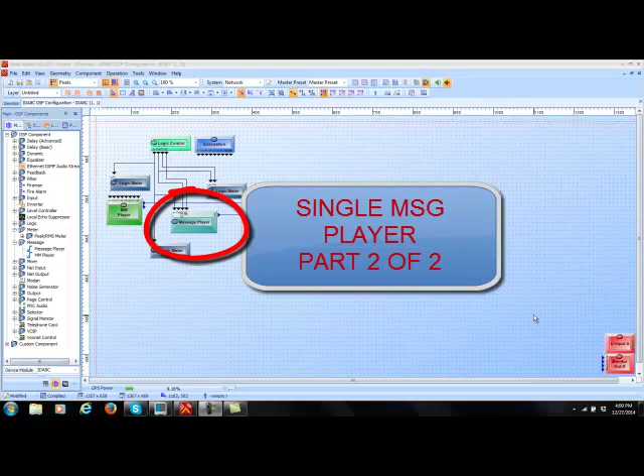And this is part 2 of the two-part tutorial video series on explaining the differences between the two message player components found in the IDA8's ATIS Studio software. Please make sure you have viewed the previous videos before this two-part series that described how to do audio message file management and the basic message player setup before viewing either of these two videos, as it is assumed at this point that you're already familiar with the file management portions of the message player setups.

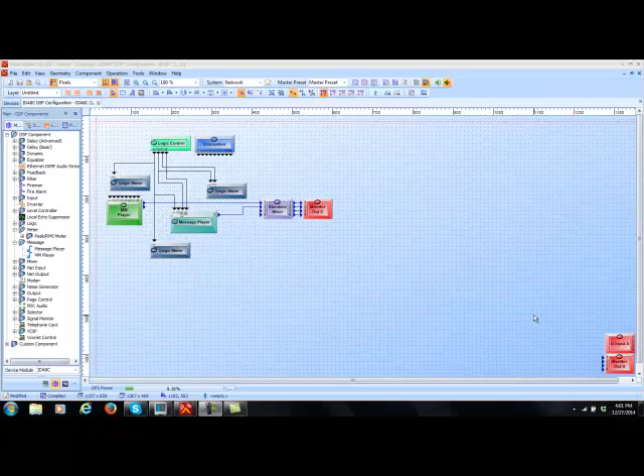As described in part 1 of this series, there are two types of DSP message players that you can use in your design, the multi-message and the single message player components. This video, part 2, will explain how to use the single message player and all of its features and functions. So let's begin. The single message player can be found right where the multi-message player is, right under message in the DSP main component list.

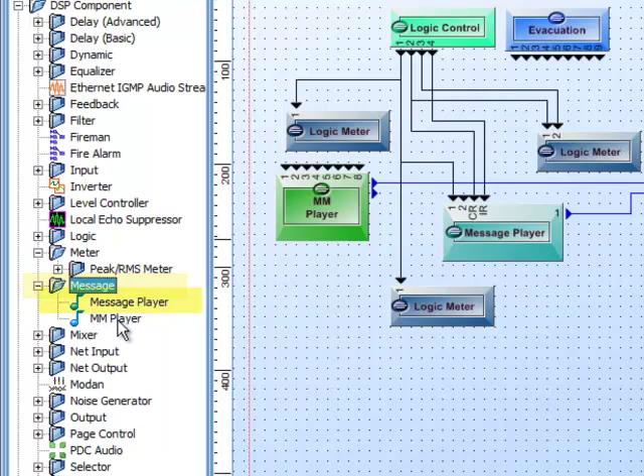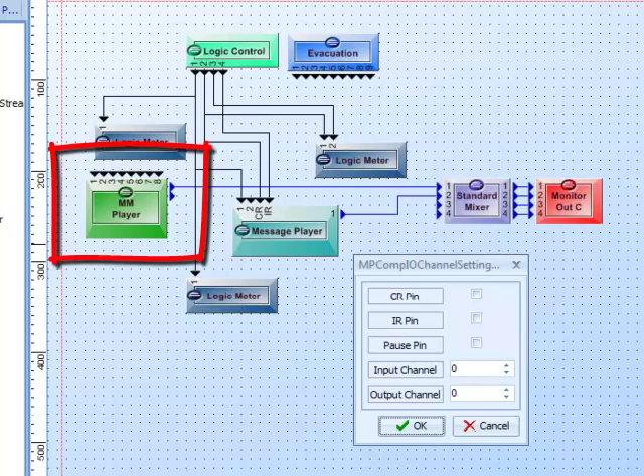If we expand the message tree out, you'll see the MM player, which is the multi-message unit, and the single message player. So if we drag a message player in here, it gives us several options to set up the message player. Now remember, in the multi-message unit, it just came in with 8 logic triggers and 2 audio outputs, and that was it. You didn't have any options. The single message player does have options, and the options are as follows.

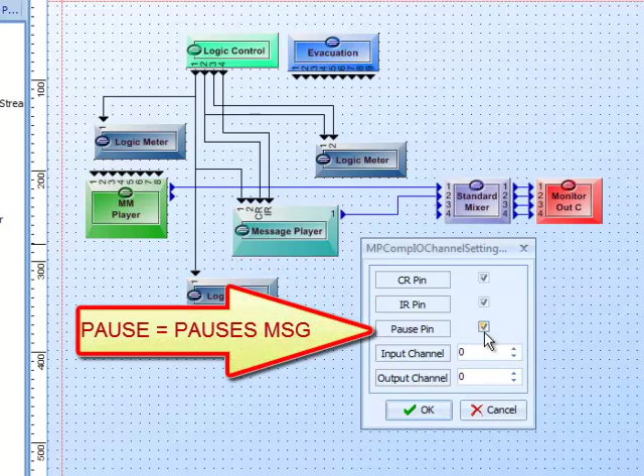The CR pin is the clear or reset pin, and you can elect to have that pin on your message player or not. The IR is the interrupt pin, and you can choose to have that logic pin on your component or not. And then the pause pin is another pin that you can elect to be shown on your component. The input and the output are just the logic input triggers, and you can enter the number of different logic triggers that you would like. And the output channel is actually the output triggers if you want to do other subsequent logic programming along with playing the message. We will stop this because I already have a message player entered in here.

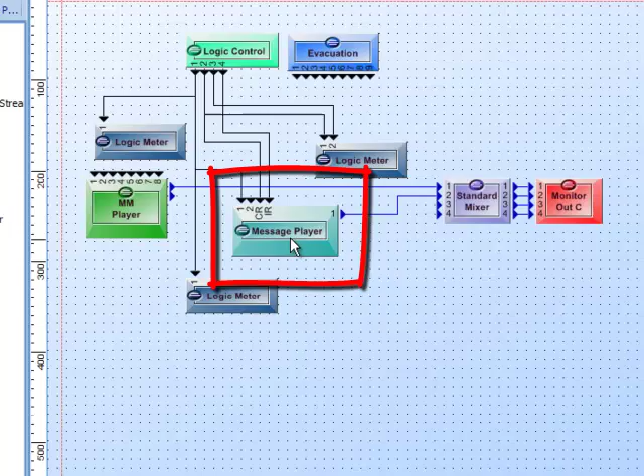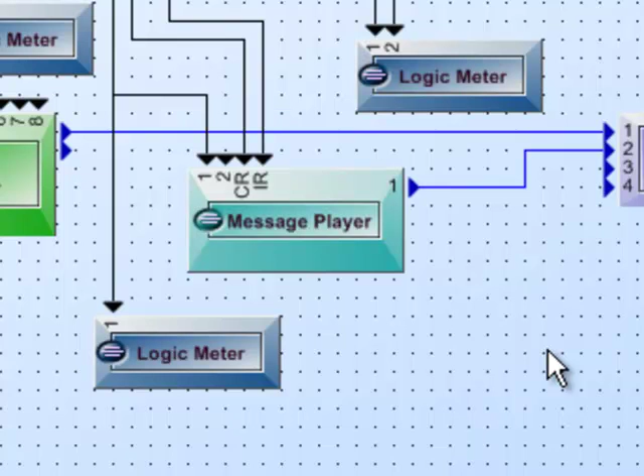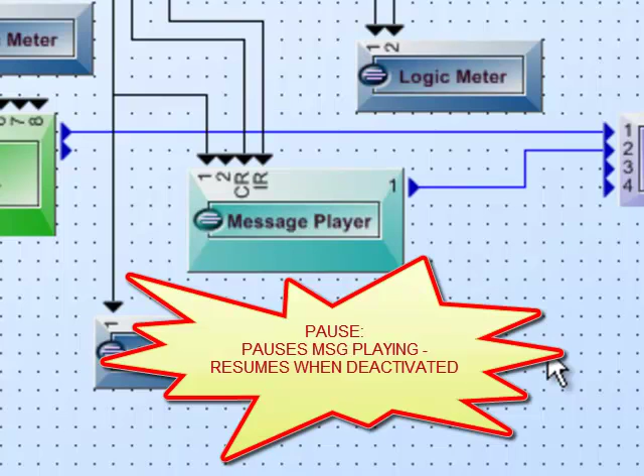I have 2 logic input channels, 1 and 2. I have the clear and reset pin shown and the interrupt pin shown. Pauses are commonly used if you have other messages or audio or pages going and you have messages that are repeating throughout the day. Then what you can do is you can actually have the page audio trigger a logic output that would trigger the pause in your message player. So that way when the pages are going, instead of ducking and losing messages, it actually pauses the message player and then picks right back up where it left off so they don't lose any audio information.

Without further ado, let's open up the single message player. I open it up. The first thing you have to do is actually create the message event. And there is only one event in the single message player. Remember, in the multi-message unit, you had 2 events because you have 2 audio outputs and you can string multiple files together to make one big message. We will click Add. And we have Event 1, and we will name this Shuffling, and we will give it an audio file to play.

Now, just like in the multi-message unit, you'll go to the same window. We want to make sure we are in the machine portion of this, and we will select the 3-tone gong. Now, just like in the multi-message unit, I can add subsequent audio files to a single message event. I will go here and I will say Shuffling. Make sure we're in the machine. Click Shuffling, and there we go.

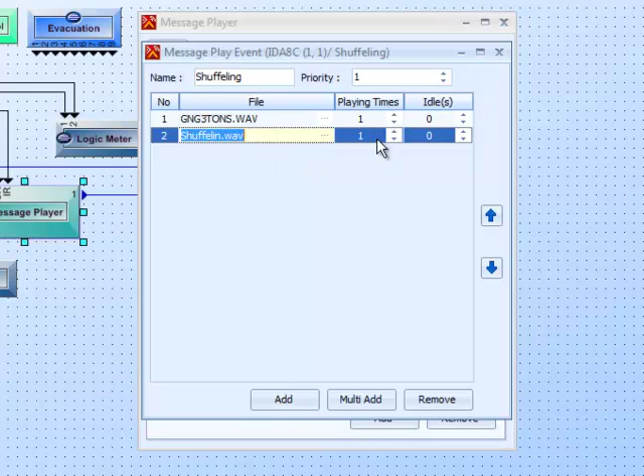Another function within the single messaging unit is that with each single audio file, I can actually select how many times I want that audio file to play before it moves on to the next file. I will leave it for 1 right now, but if I left it for 2 or 3, it would play the 3-tone gong 2 or 3 times. Then it would move on to play the next audio file, the shuffling.

The idle in seconds is actually the time between the audio files that it plays. Remember, in the multi-message unit, it played one right after another to make a coherent long message. With this one, you can play multiple messages and add seconds of space between each audio segment. So we will say nothing between the gong and the shuffling, but we will say 1 second from the shuffling before it goes back to do anything else, such as if we tell it to repeat twice, there will be a 1 second pause between the repeats.

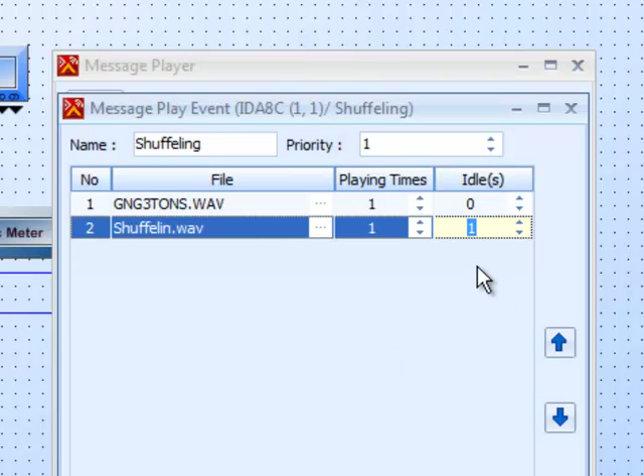So that's all we need to do for that. So now we've created our event. Now we can add other events, let's just say Delta, and we can select the message file that we want for the Delta, just like we did before.

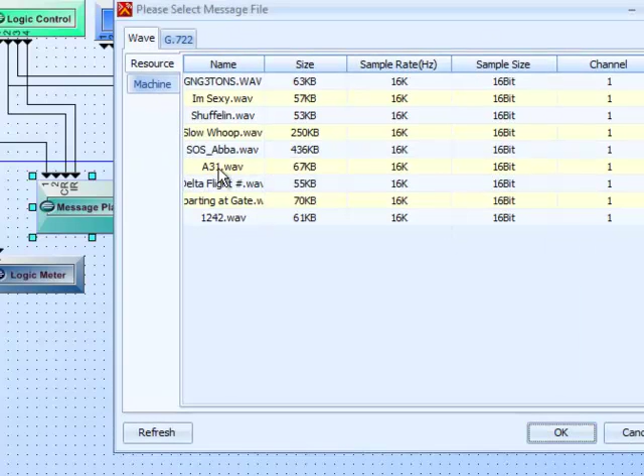There's Delta flight number 1242, and it's departing from a new gate, and we will add that, and that would be A31. And if we leave these zeros, it would play it straight through. At the end, let's say we'll put a 2-second pause, and there you go.

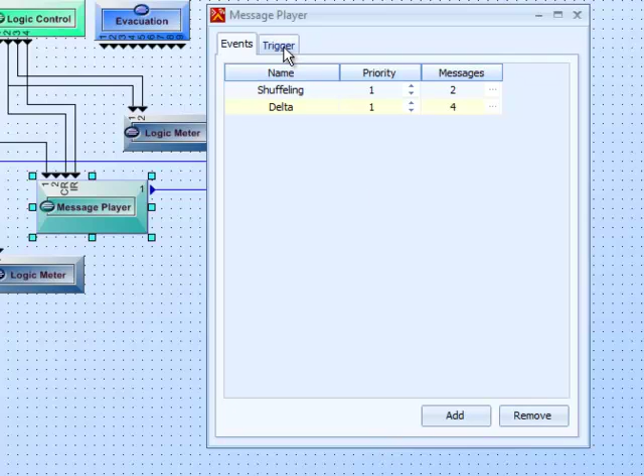So now we can have multiple events. The key is when you assign these events to the triggers, it's only going to play one event at a time. So let's go now from the events to the trigger tab.

Here is our 2 channels of trigger. If we had all of the triggers, we added 6, you'd see 6 channels and you'd see 6 trigger nodes, but we only had 2. So let's just start with number 1.

All the events that you created in the events tab would be listed here. So let's do the shuffling. Just for fun, let's add the Delta as trigger number 2. The key is the multiple message unit will play multiple messages at the same time, up to 2.

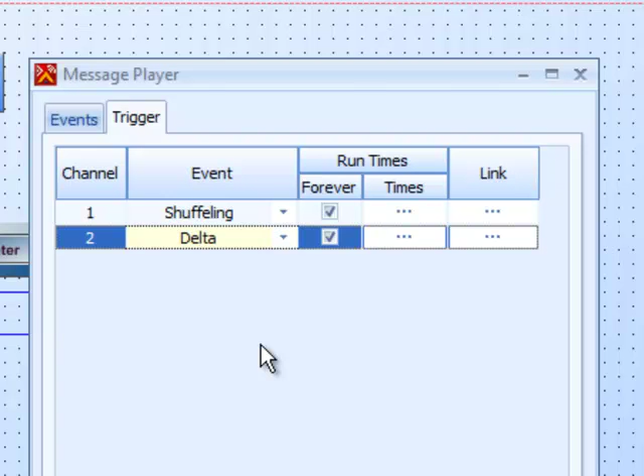The single player will only play 1 at a time. Even if you have 8 triggers, 8 different message events, it will only play 1 at a time. It cannot do multiple ones because, as you see here, it only has 1 output for the audio.

Some big differences also in the single message player from the multi-message unit is you have these other options concerning or detailing how you want the trigger function to operate.

It defaults to forever, which means whenever trigger 1 or channel 1 is triggered, this message in its entirety with all the audio files associated with that event will play forever until we clear or reset it, or interrupt it. And we can decide how and when we want to be able to interrupt that by just clicking on this link under times.

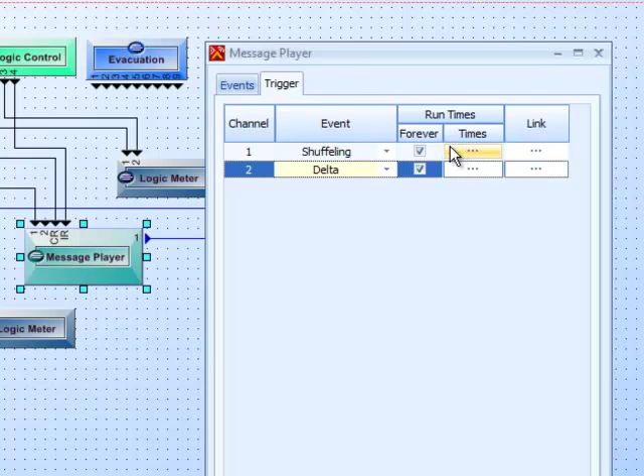So I will click here, and as you will see, we got a couple other interrupt settings, a couple of options here. This is the default for all the messages in the message player. If I set this interrupt to enable, I will take this out so you'll see how it looks normal. If the interrupt is enabled, that means I will be able to interrupt this message anytime it's playing.

By either opening up the contact closure to trigger it, or discontinuing the trigger by breaking the contact, or sending a logic trigger to the interrupt or IR pin, or sending a trigger to the CR, or clear and reset pin.

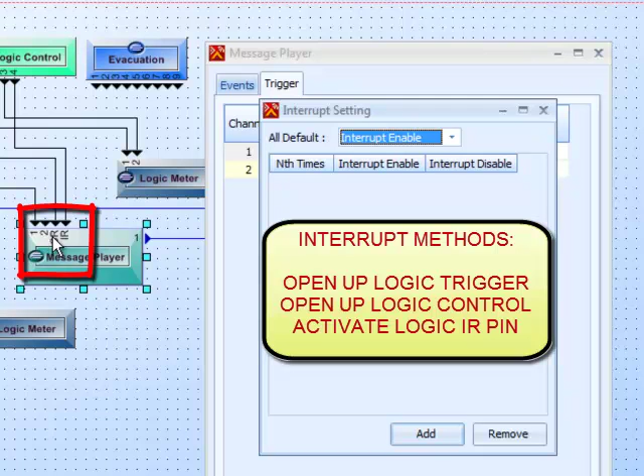Now, if I have this enabled, I can actually say, well, maybe I don't want to be able to stop it in the middle. I only want to interrupt it after it plays the current audio file. To do that, we can add a qualifier.

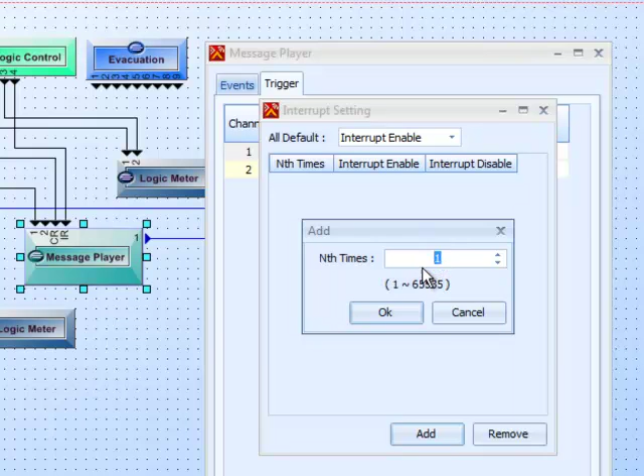So let's say after it plays once, or after it plays twice, or during the second one and on, I want to not be able to interrupt it, and it's going to be within the 2 times or past that time. So if it's within the first one, I will not be able to interrupt this file.

So we will say yes, and we will close this, and we will compile, and we will store. Okay, and we're back online.

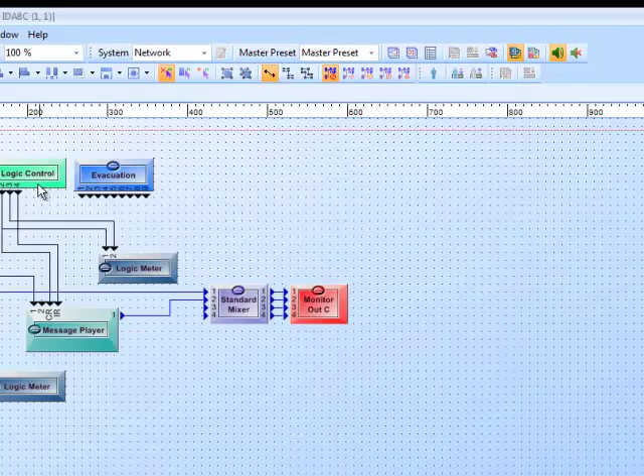Now, to demonstrate this, I have it just like I set it up in the multi-message player. I've got my logic controls that I can trigger manually here, and I've got some meters so we can see what's going on with the logic.

There we go. Logic number 1 will actually trigger the message to play. Logic number 2 is actually the clear and reset, and logic number 4 is the interrupt signal. So like we said, if we play it once, it'll keep playing forever, and we have interrupt enabled.

And I can stop it. I can stop it manually like that because interrupt is enabled. I can play it again.

Now I can come in with my number 4 and actually do the interrupt this way with another contact. And see, at the interrupt, it will actually finish playing at the end of the file because we were in the second one, which was the key. And then once everything's reset.

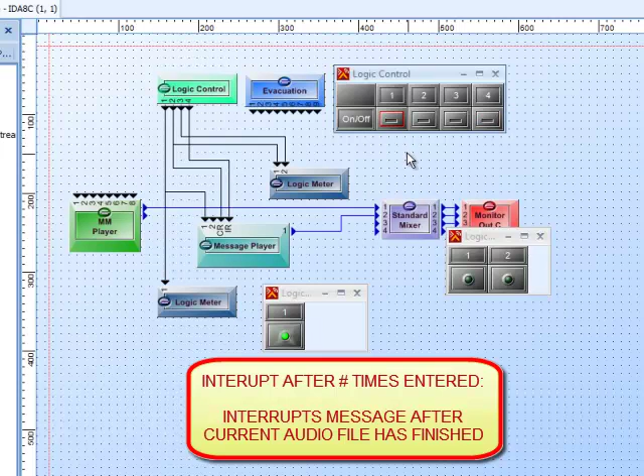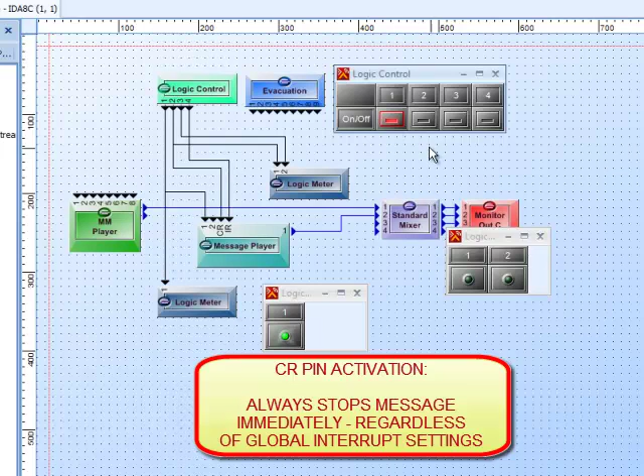The clear and reset, no matter what you set for interrupt, enable, or disable, will always stop the message where it is and reset the machine. We can simulate that by doing it right here on pin number 2. And then we're reset, ready to go.

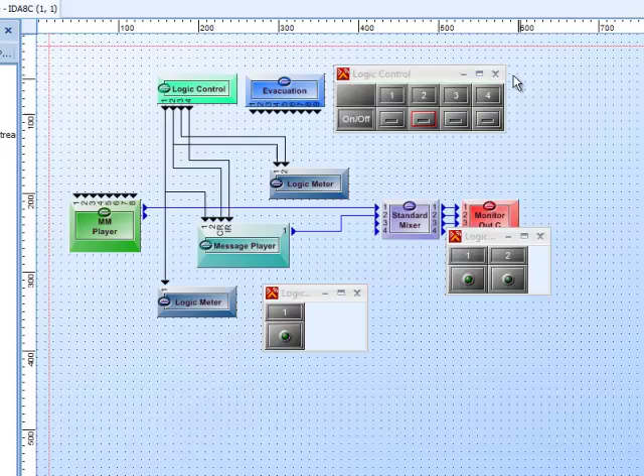That is setting it up with interrupt enable. So let's go offline. We will go back into the same message. We'll go to the trigger, and this time we are going to set the interrupt to disable. And if I set the disable, I can set the enable, and we could say within 2.

This means that whenever everything is set so I cannot disable this message, I want it to keep going and keep going until I get a clear and reset signal. But I do want to give them an out in case of a false alarm. So if the global interrupt disable is selected here, that means we can interrupt the message playing within this number of times that we put here.

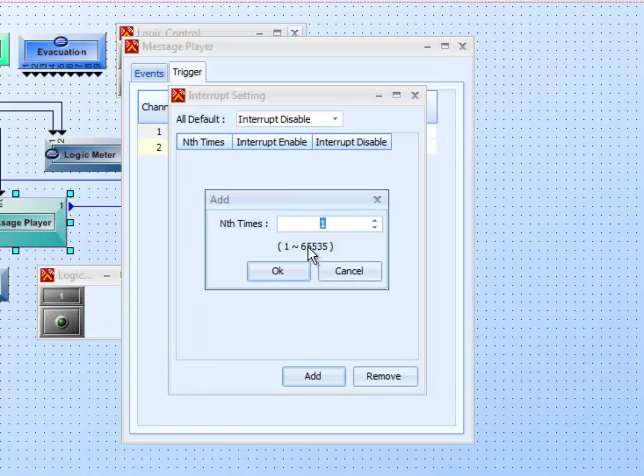Just to show you what that means, I could add this, and if I say okay, since it's forever, it says 1 to 65,000 and some odd, but if you put, say, repeat 3 times, then it would have 1 to 3 here. But we'll just say if within the first 2 times it's playing, I want to be able to interrupt it, then that's what's going to happen there. This is the difference.

We'll compile and store. And we will enable, go online. All right, open this back up. And now you'll see we will play this, and it will play.

If I'm within the 2, I can stop it. There you go, just by opening up the contact. The same would play as if I did an interrupt.

And sorry, I hit 3, but if you hit 4, it stops it. And everything's fine. So let's let it play past the 2 times, and let's see if we can interrupt it now, since we set the global interrupt disabled. Now we're playing the second time.

Now I should not be able to stop the message by breaking it. It's still playing. Now even if I hit the interrupt pin, number 4, it's still going to play. I cannot stop this by interrupting it.

The only thing I can do at this point is hit the clear and reset, which is number 2. Now the message player is reset.

So that is the big difference between the single message player and the multi-message player: I have all of these interrupt features and functions and times and everything like that.

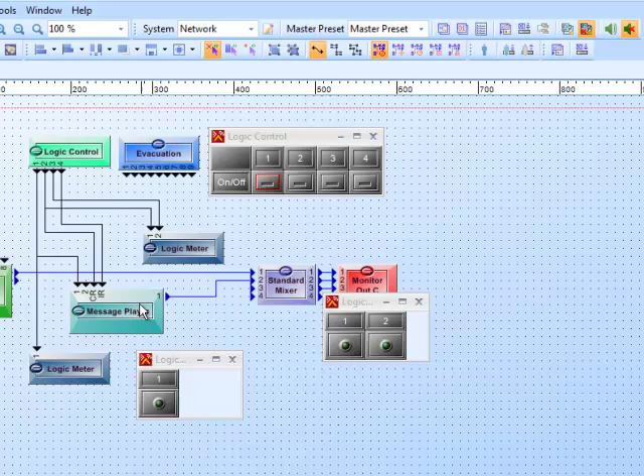If I go offline, one last feature we could do with the message player, instead of having it play forever, we'll go offline, is we can actually dictate how many times we want this trigger message to play. If it's forever, there's no enter number of times here, but if we take it off of play forever or continuous, we can actually enter in the number of times we want that message to play.

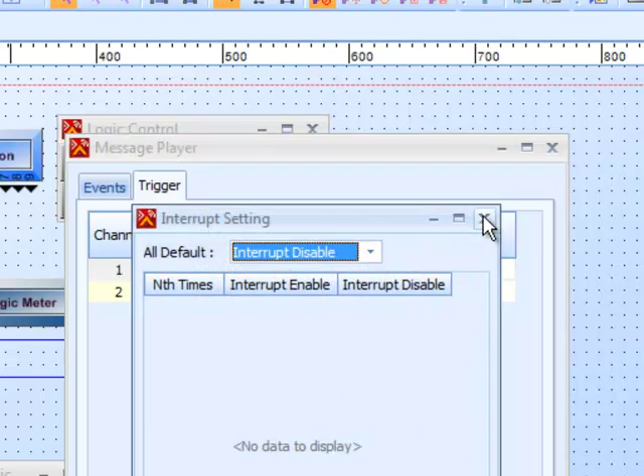So if we say 2 right here, and we'll make sure the interrupt is disabled, and we don't need to do that because we always want it to play twice whenever the message is triggered to play. So we've got it set for twice. Let's compile. Let's store.

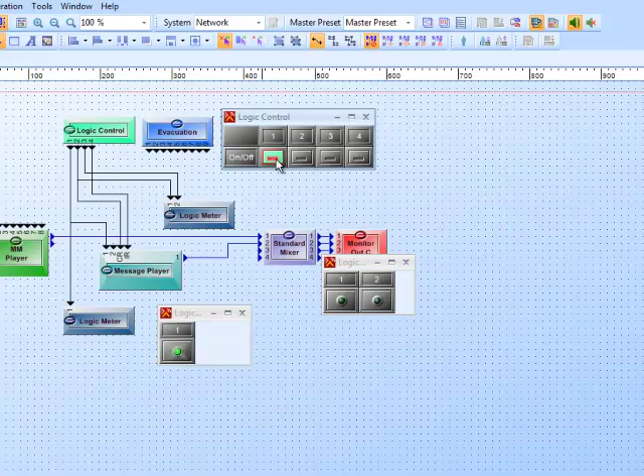We'll turn this off. And as you can see in here, we also had the trigger for that. The interrupt is disabled. So that should mean we should be able to play this and even break this contact in the middle of playing, but it's still going to play twice.

We'll break it. See, logic is gone, but it still plays its 2 times and then it's done.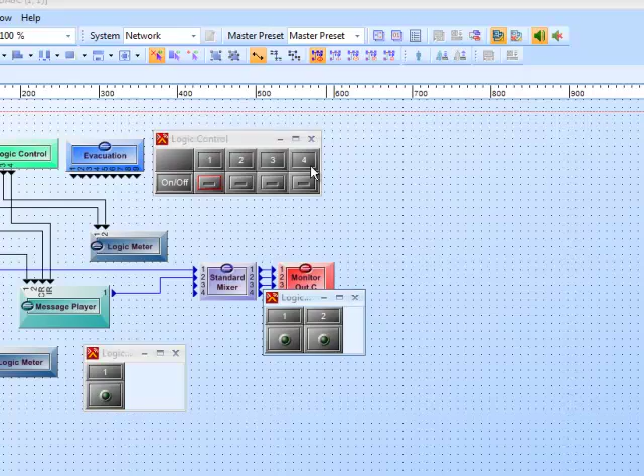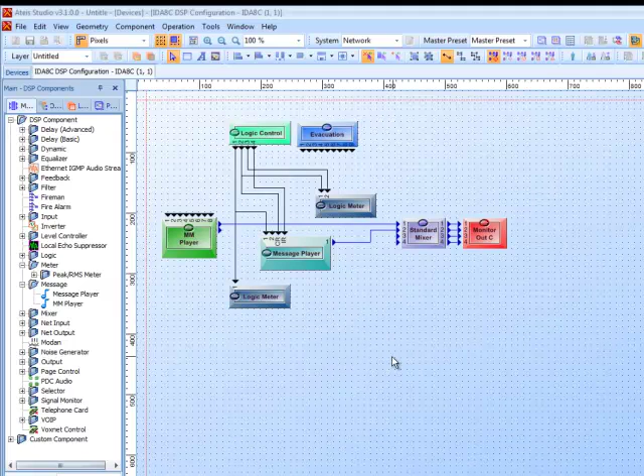So I hope that helps clear you up on the differences between the multi-message player and the single message player. And remember, you can bring as many single message players into the system that you want. There really is no limit. You have 2 multi-message players you can bring in and as many single message players as you want.